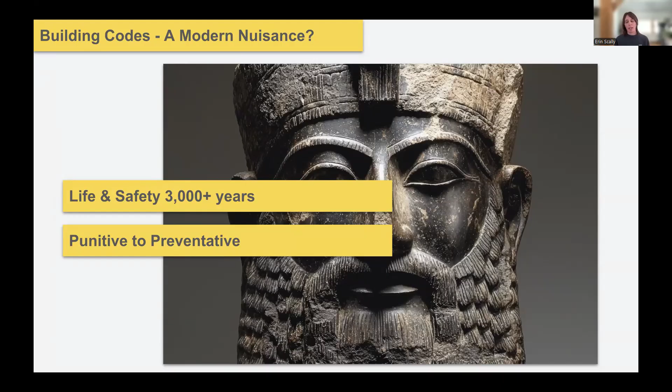But really, what we're going to get into today is energy codes. And we can see that energy codes are actually a more modern code development. Attention started being brought to energy as early as the 1950s in the States. People began to default on their federally backed mortgages because they could not pay both their energy bills and their mortgages. We would assume that 75 years later we don't have this problem, but we still do - people are still making that choice, to pay either their mortgage or their energy bills.

Nationally, attention was brought again to energy in the 1970s with the US oil embargo. The oil embargo sent gas prices skyrocketing and the cost of petroleum products through the roof. So there was a real need to start having a mindset where we conserve energy in our built environment. Around the 1990s, our model energy codes start to take shape, and in 1998 the International Energy Conservation Code started to take shape, and that's what we're here to talk about today.

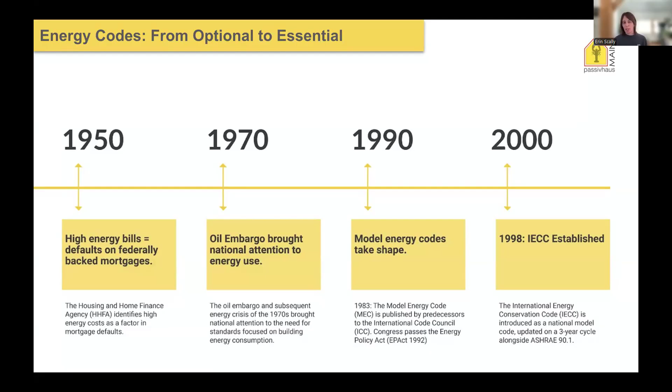So a very brief overview on what the IECC is. The IECC stands for International Energy Conservation Code. It's created and maintained by the International Code Council. The code book itself is built through a comprehensive stakeholder process, meaning anyone can submit proposals for a change. It's then reviewed by a technical committee and approved by a public safety official. New editions of the IECC are put out every 3 years.

So how does all this work in Maine? MUBEC, Maine Uniform Building and Energy Code, adopts the ICC base codes. That includes the International Energy Conservation Code, but also things like the International Residential Code and the International Mechanical Code. MUBEC then takes those base codes and makes Maine specific revisions.

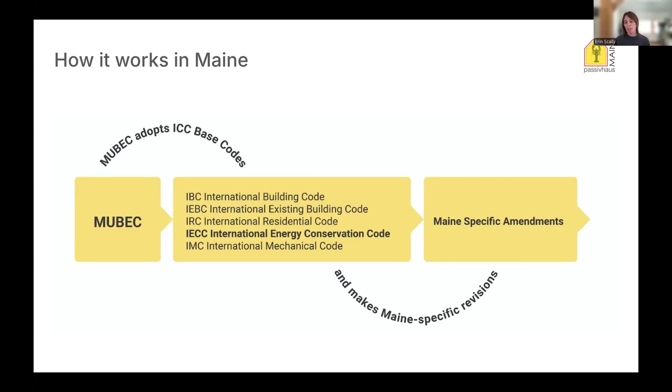MUBEC also adopts reference standards. Pertinent to commercial code is ASHRAE 90.1, the energy standard for buildings except low-rise residential, and ASHRAE 62.1, ventilation for acceptable indoor air quality. So it's the ICC base codes, plus the Maine state amendments, plus these reference standards, that equal the code stack that Maine builders can work from.

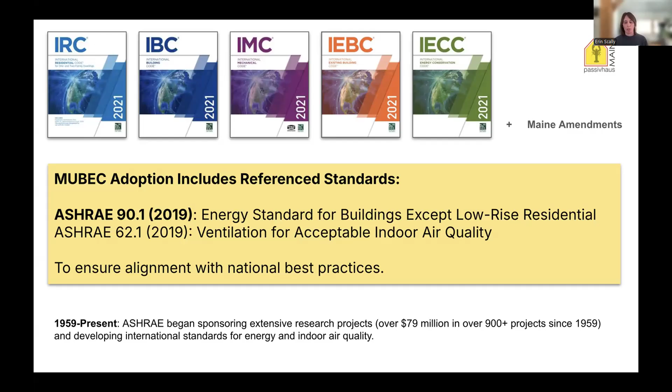It's really important to point out that MUBEC is law everywhere in Maine. All new buildings constructed in Maine must comply with the IECC and other base codes, plus amendments. The confusing point is that some towns with a population under 4,000 are not yet actively enforcing compliance, but that doesn't mean builders or designers in those municipalities don't have to build to code. They absolutely do. MUBEC is law all across the state. Everyone has to build to these base codes plus amendment standards.

So the question often arises, why do we build to code even when it's not enforced in a municipality? Again, MUBEC is still law, even if your town doesn't enforce it. You might have a CEO in your town, and if you're in a town under 4,000, they do not have to come and do inspections, but you still need to build or design to that standard. Ignoring MUBEC is a violation of the law, and non-compliance can cause problems down the road. Builders can be held liable for issues that arise.

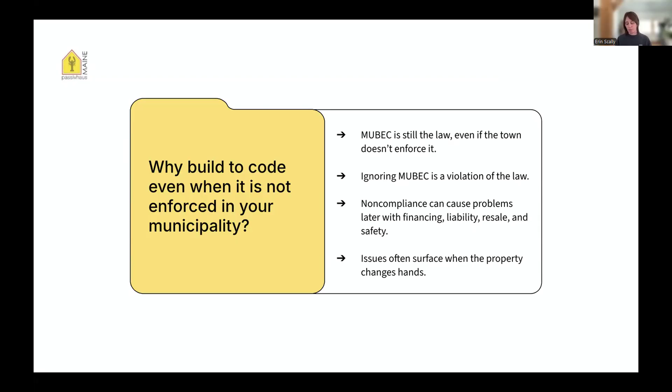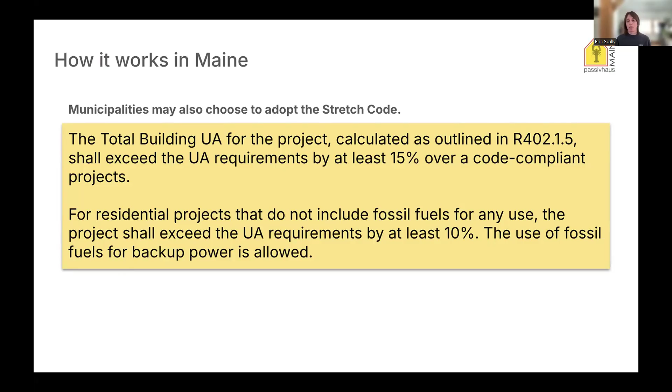One other point about MUBEC and its adoption process: they also have a stretch code, which means certain municipalities that opt to adopt it need to beat the base requirements by 15% over code compliance. Right now in Maine, there are only 3 municipalities using the stretch code: Portland, South Portland, and Freeport. So at this point, we know our base codes, and that we need to follow the base codes plus the Maine state amendments. You also need to be aware of stretch code depending on where you're building or designing, because you might also have to meet that requirement.

So where do we find these codes and information? The ICC base codes can be viewed on the ICC website for free. You can look at a PDF publication. The Maine specific amendments are currently housed on the Maine State Fire Marshal's website. It is moving to MOCA, Maine Office of Community Affairs, soon, but last I checked, MOCA still links through to the Maine State Fire Marshal's website.

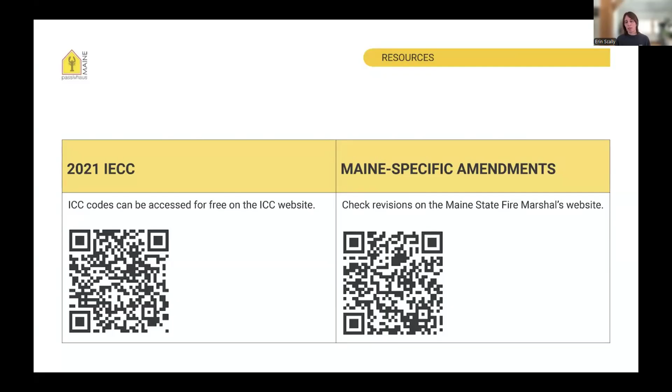Now getting into why we're here today: on April 7th of 2025, Maine switched from using the 2015 IECC to the 2021 IECC, which is a 10% increase in energy savings over those two code publications. For all the education and awareness needed when we change codes, we think, well, what is 10%? That doesn't seem like a lot. We have to zoom out to put this in context. That's a 40% increase in energy savings since 2006. So we're making big strides incrementally throughout each code update.

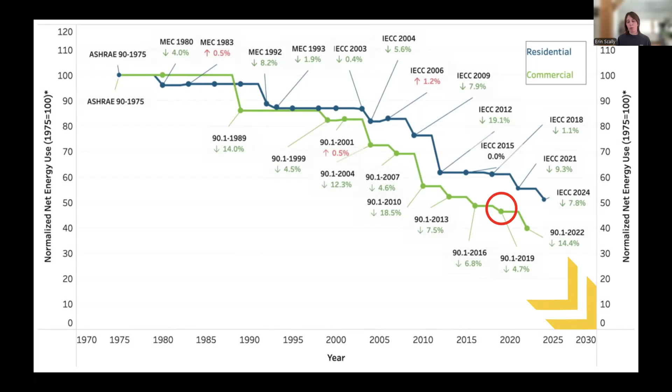We also know where codes are heading. This is a graph put out by the US Department of Energy. The red circle shows us where we are in 2021, pointing down to 2030 with the goal of net zero. This is why Passive House Maine, as a nonprofit, brings in people like Vamshi and Mike, who have been focused on energy modeling for the past 20 years and on high performance building, because we can see this is where codes are going. We're heading towards high performance and passive house levels.

So we know how to find our codes. We know which publications to look at. We know we have to understand the Maine state amendments. We also have to be aware of where we are living, whether codes are being enforced or not—we still have to build to the codes. And we also have to be aware of the stretch code.

Now we have to understand what is the commercial scope. What counts as a commercial building? By code standards, that's a non-residential building, more than 3 stories. On the left, you'll see a 3-story mixed-use building where the top 2 floors are designated residential, so you'd follow the residential provisions of the IECC, and since it's retail on the bottom, that would fall under commercial. But if you bumped that 3-story structure up to 4 stories, the entire structure would fall under commercial provisions of the IECC.

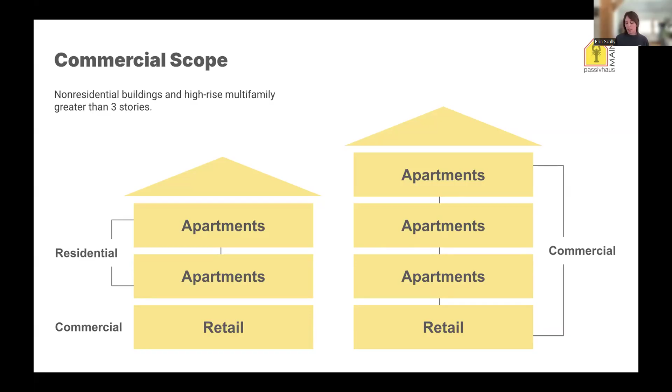So now we're going to jump into: we know what our codes are, where to find them, we have all that information. How do we show that we've met this energy code? That's called compliance. Compliance can be met in one of three ways, at the discretion of the building owner or designer. Within the 2021 IECC, you can choose the prescriptive compliance option, the total building performance option, or ASHRAE 90.1. ASHRAE 90.1, until this publication of the IECC, used to just be a state-adopted reference standard, but now it's actually listed in the IECC as a compliance pathway.

When we talk about how code changes between publications, we know that for 2021 IECC, the majority of the updates from the previous version, 2018, were increased R values or decreased U factors. Really, those increases or decreases were bringing the IECC into alignment with ASHRAE 90.1. ASHRAE uses a cost analysis to make sure that when they increase R value, the payback period for the occupant or building owner makes financial sense, that there's a return on investment on that increase of insulation.

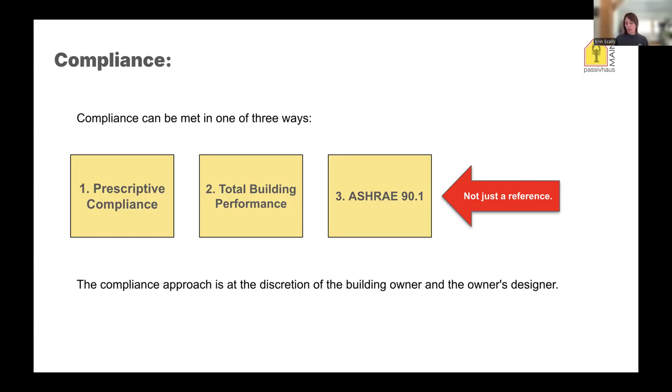I'm going to let Vamshi chime in here with additional energy efficient credits. Thanks, Erin. So one of the biggest changes in this particular IECC 2021 is the requirement to achieve additional energy efficiency credits. It's not just meeting the R values and efficiencies of mechanical systems or lighting power density, but you also have to get 10 additional points by choosing one of these things you see on the screen. These particular requirements push beyond what the prescriptive requirements are. You need to look at your occupancy group type. For example, a residential building has different weighting for points for different credits, and business type could get different weighting. So out of all these things, you need to achieve at least 10 energy efficiency points.

You have points for improving heating efficiency, cooling system efficiency, reducing lighting power density beyond what is prescribed, and additional controls for lighting. For residential projects, they have specifically called out three of them, shown on the second column at the top. One is recovering heat from condensers, or having solar water heaters instead of fossil fuel based water heaters for domestic hot water, using heat pumps, and so on, and also pushing air tightness further than what IECC prescribes. These are some important pieces to keep in mind when looking at the prescriptive approach for your project. Thanks, Vamshi.

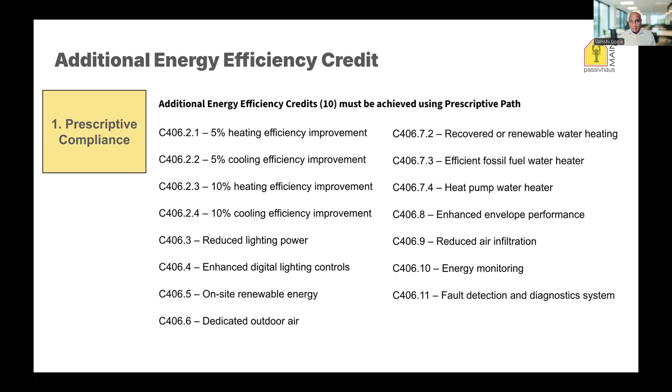The IECC, as noted, has three compliance pathway options, but the MUBEC has also adopted alternate pathways to show compliance that your building meets the energy standards, and that's the DOE Zero Energy Ready Home Certificate, or the Passive House certification, either by PHI or PHIUS—PHI being the Passive House Institute, or PHIUS being the U.S. version of PHI.

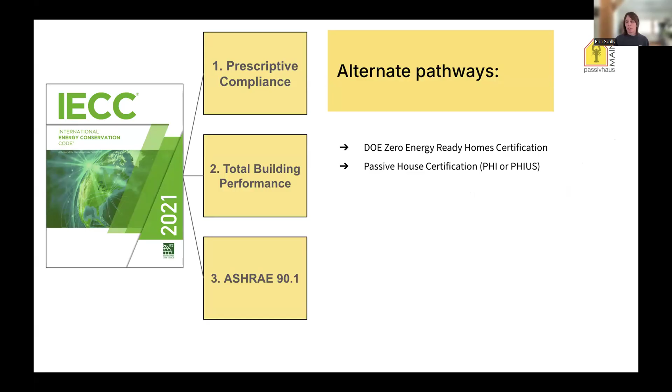Now we're going to get into the nuts and bolts of the compliance pathway options. We're going to chat first about prescriptive compliance. Prescriptive compliance in commercial can be met one of three ways: it can be met by following the R value table, it could be met by following the U, C, or F factor table, or it can be met by following the component performance alternative.

So in prescriptive compliance, you choose one of those pathways—say you choose R value and go by the R value table. You also have mandatory requirements regardless of which pathway you choose. So you have to meet the R value table, those three additional mandatory requirements, plus the energy efficiency package options, which are the credits Vamshi just outlined. You have to do all those things to show compliance the prescriptive way.

Prescriptive is the most rigid—you don't have trade-off or flexibility, particularly when following the R value or U factor table. You start to see some trade-off when you go with component performance, meaning the R value table lists every component of your building, from foundation to roof, with the required R value. Once you get into energy modeling, if you put in better windows and doors, you might be able to take reductions elsewhere. So energy modeling can be viewed as a cost savings, or at least a way of optimizing your insulation instead of just following the prescriptive checklist of R values and insulation values to meet.

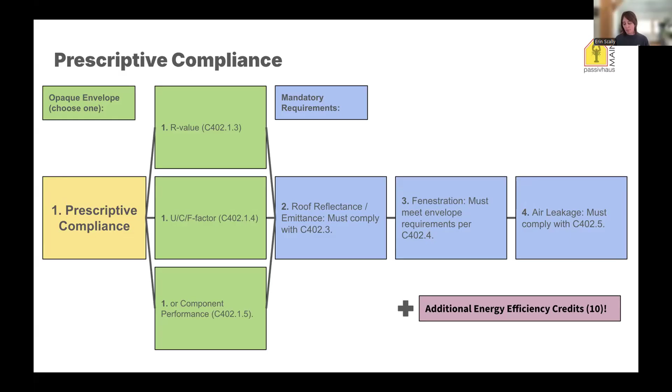I'm going to kick this one off to Vamshi, right? Or is it Mike? Yeah, I can take that.

As Erin showed earlier, there are three ways to meet the envelope performance requirements—R value, U factor, and this last one. With the other two options, you must meet those R values or U factors. With this one, it gives you a little bit of flexibility within the envelope components only—you cannot do a trade-off outside the envelope components. So if you're unable to hit certain R values for your wall systems, for whatever practical reasons you cannot insulate beyond the prescribed R values, you can compensate for that on the roof.

You could add an additional inch of insulation or 2 inches, whatever the case might be. So what it does is it takes the U factors of your walls, roofs, windows, slab on grade, and all your envelope components where your heat losses are through, and for each of those components you multiply the area of that surface.

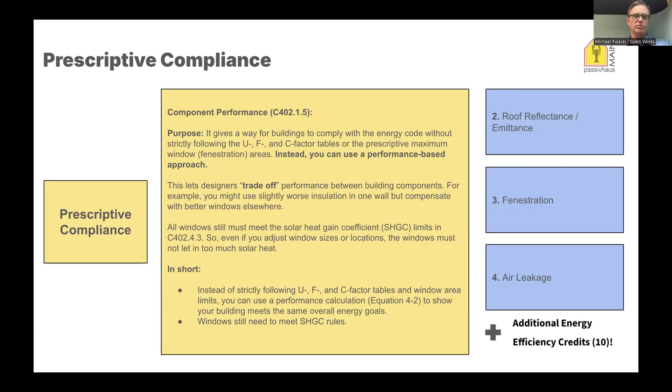I could just chime in on one other opportunity I see, which is to try to figure out how to cost optimize your envelope. This allows you, as Vamshi was saying, to put more insulation or better performance in certain components and less in others. So one opportunity is if you're using better performing windows, which is really important in our environment, you might be able to reduce the insulation on the wall systems or roof systems to accommodate that, and find the most efficient way to achieve your performance. It gives you that flexibility with a very simple tool, just doing a spreadsheet calculation of the U value of that product and the area in the code versus the U value and area of what you're proposing.

I'm also going to let Vamshi and Mike handle the next two compliance options. We have total building performance up next, and then after that, ASHRAE 90.1. Vamshi, do you want to take this one? Yeah, okay, so this is the other option that Erin showed earlier.

This is one option where you use an energy model to show that your proposed design is performing at or below the energy code. One of the advantages of this, as I mentioned earlier, is that with component performance for showing compliance with just the envelope piece, you are stuck with trade-offs within the envelope pieces, whereas in total building performance you can do trade-offs between different trades or disciplines. You may have really efficient lighting systems, really good lighting controls, and that could contribute to the overall performance of the building.

So what is really required in this approach or pathway is you create a baseline energy model which corresponds to your standard reference design case, your reference case, which is IECC 2021. So you're building your envelope systems as per the R values or U factors in IECC 2021, your lighting power density as per IECC 2021, your mechanical system efficiencies as per IECC 21, and so on and so forth. Then you create another model which aligns with your proposed design, and you build and develop that model, and the target is you need to be 20% less than your reference standard energy model.

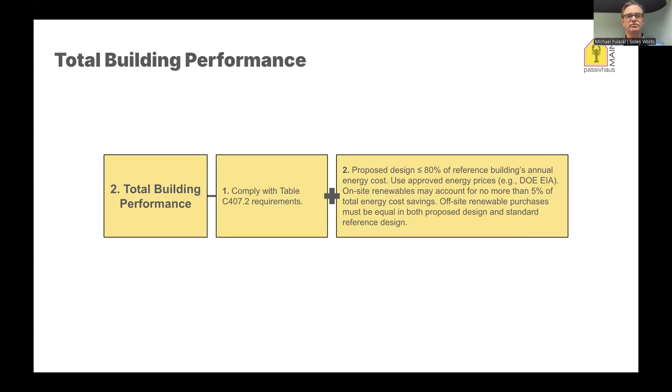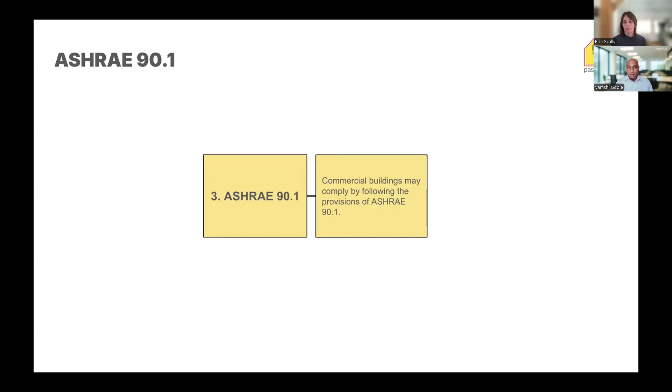ASHRAE 90.1 and IECC 2021 have been a little bit staggered historically, but now they're actually trying to align with each other, and there's always been cross-reference in IECC 2021 to ASHRAE 90.1 sections. So the other alternative method for showing compliance is ASHRAE 90.1 Appendix G or Section 11 for energy modeling, or you could also use prescriptive, which would be pretty similar to IECC 2021. The one important difference in ASHRAE 90.1 is they have clearly described the modeling methodology, so it's very well detailed out. There are two different approaches even for energy modeling, Section 11 energy cost budget, and the performance based pathway, which is Appendix G.

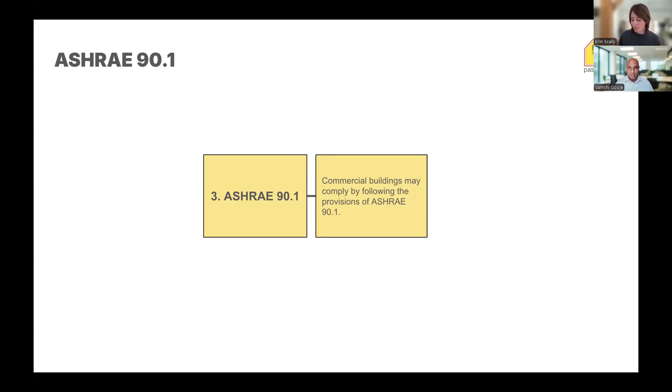You do need to know a few key details: what is your energy code, where are you building, project details, building type and size. You need to know your area takeoffs for your envelope—roof, walls, floors, foundations—and what the R values or insulation values are. You need to know your lighting information, mechanical system details, and your service water heating information. But when you have all that in hand, you can sit down and use ComCheck.

Once you have all the information put in, it will show you very clearly if you met the energy conservation code. It really takes out the guesswork of whether you've complied with the code or not, less referencing the code book itself or reference standards. New in the last few months is that ComCheck and ResCheck both account for state-specific amendments. So if you plug in your state and your zip code, it will automatically load in the state-specific amendments, so when you see if you comply, you know you're not only complying with the base codes, but also with the state amendments.

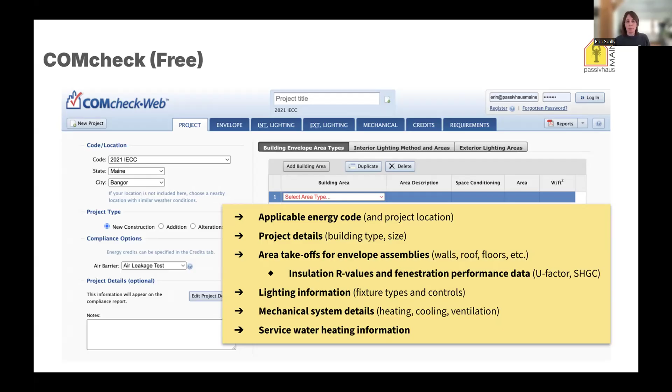Existing building scope. We always have questions about: I'm not building a new commercial building, I'm not building a new residential house, but I'm working on an existing structure. What does that mean for me as far as meeting the IECC? It really depends on the scope of work.

Additions: the new addition must comply fully with the 2021 IECC. But largely, with any scope of work, the parts that are untouched or unchanged in the building do not need to be brought up to meet compliance of the 2021 IECC.

If we're doing something like changing an unconditioned space to conditioned space, typically that whole entire space needs to meet the new energy standards. Mike or Vamshi, do you have any other additions for existing building scope? No? All set?

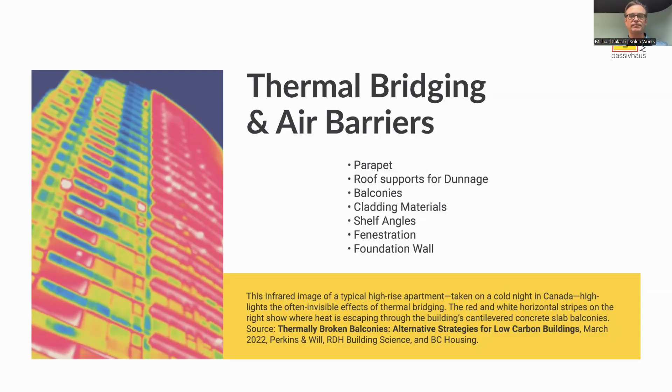That's a lot. So that's how much you're wasting the money by investing in an envelope if you're not addressing this one. And most of these areas that we're going to run through are transition details. It's not necessarily just one

And the issue with having parapet is if you have short parapet, you can still manage to get a pretty decent detail. But as your parapet height increases, you have potential for some of the warm and humid air from the inside escaping into that area and potentially causing some condensation issues. So it's best to avoid it.

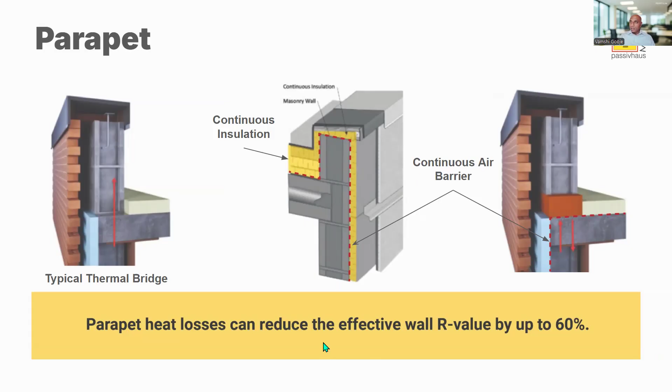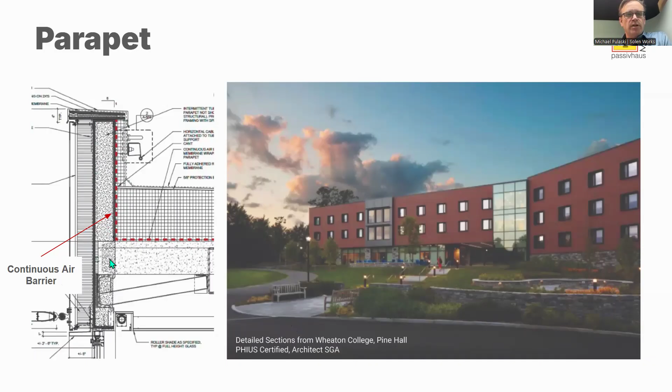Even though it's relatively small, it's enough to cap off the top. And then you can see the air barrier there is in red as it goes all the way around the entire, up the entire parapet wall and then come back and around on the outside.

And the next detail is, there are two types of thermal bridges that I should have actually started with. One is the linear thermal bridge, which means it's very continuous - it goes across the entire axis of a particular surface. And the other one is the point thermal bridges. So point thermal bridges, you can think about all fasteners used to secure the sheathing to the structure, right? So you don't have continuous thermal bridges there, but only point thermal bridges.

So one of those point thermal bridges is the roof screens or dunnage that you have on the roof. And similarly, they have potential for 15 to 20% reduction in R value when we run heat loss, heat transfer analysis. It depends on how many point thermal bridges you have, but that's a rough average of how much heat you can lose through these details.

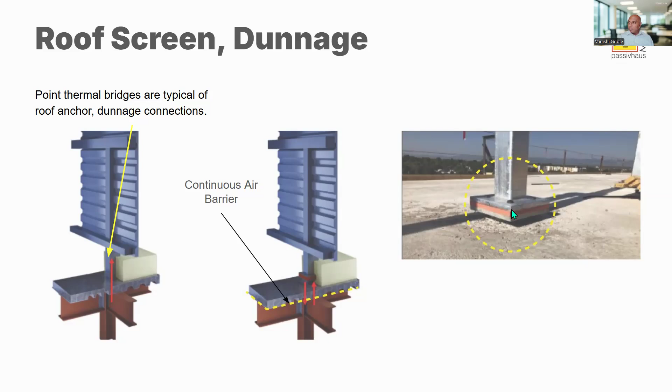And here's a similar detail. And this is the detail from the Wheaton College project. And this you have structural steel tubing coming up out of the deck, and you can see the Fabreeka pad there called out. It just creates a separation between the warm concrete block and the steel plate.

And one of the primary reasons that we're showing you these thermal details is that this can be an issue from condensation. So if you have this cold steel plate coming in and connecting with warm air on the warm slab, water can condense on there, create condensation, and have problems, and that can occur in any of these situations. So having these thermal break pads and our other thermal break details is critical to eliminating that risk for condensation.

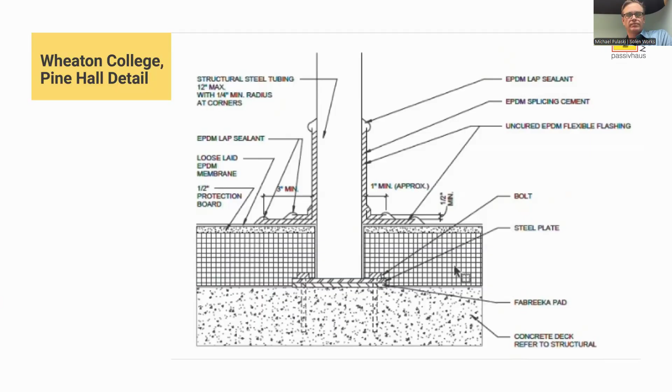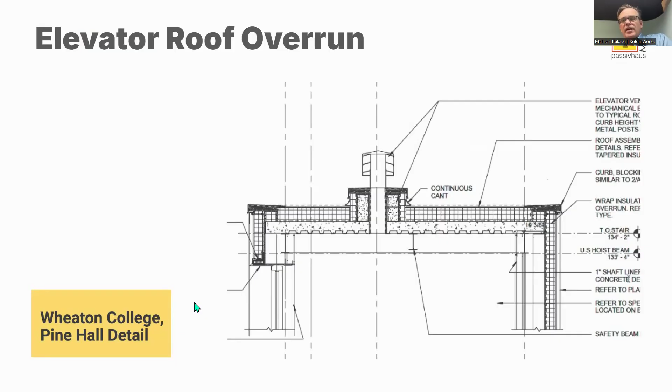Similar detail for elevator overrun here. This is a detail that exists on every commercial project, and you just have to make sure you're detailing it and paying attention to the air barrier on it. There's less on the thermal bridging here, but more the fact that you have to follow the dash line around the outside of the wall system that comes up over the top of the roof, and then comes all the way into terminating at the curb there.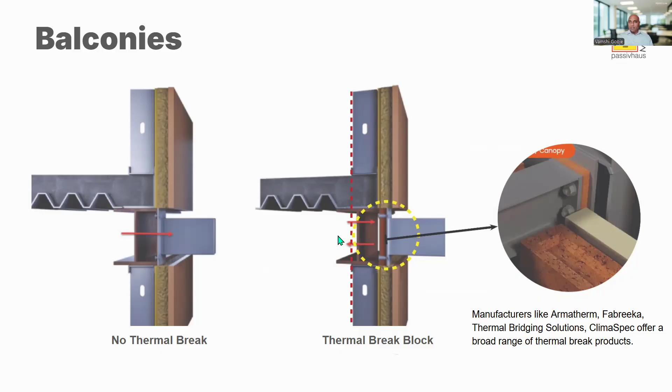The other continuous, linear, or point bridges that could happen quite often is when you're attaching your rain screen to your system. You either have Z channels, Z girts, or hat channels, or whatnot, the way you design it. If these are not decoupled from the structure, they can also lose up to 65% of heat, or loss of R value in the envelope.

Just to highlight how critical this is when you're using a prescriptive approach for compliance, if you don't address these small details, you may have to end up insulating significantly, which makes it almost impractical to meet your energy code. So these are very important, especially in the latest code. It used to be there was no verification, and now they want to make sure your thermal bridges are accounted for when you document your U factors in your drawings and specifications.

So there are Z-girts, there are some fiberglass-based spacers, and so on and so forth to eliminate thermal bridges.

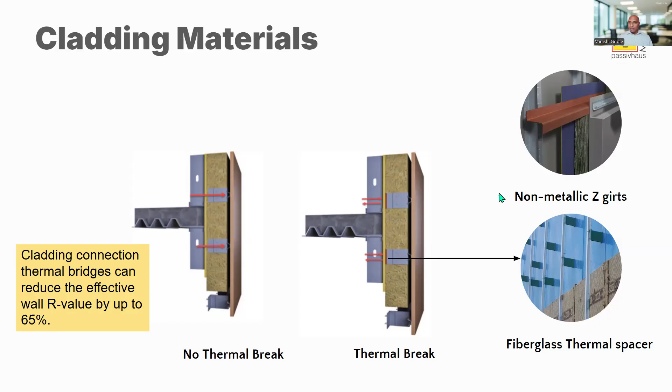Shelf angles, again, continuous when you have masonry, which you'll see in a lot of buildings in Maine as well, especially in K through 12. They have some face brick facades, and you have similar heat loss potential through the envelope. So it's good to look at thermal break pads where your shelf angles are connected to your structure. You also have fiberglass reinforced shelf angles, which have slightly better R value.

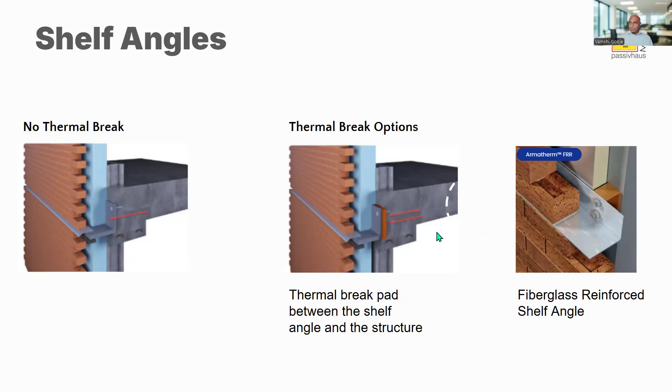This is an example, a quick detail from Wheaton, and you can see that outside of the wall system there's actually about 5 inches of mineral wool there, and there were some Z-girts in between that then connect to the angle that holds up the brick. So that's the detail we ended up working out through Wheaton, but the key piece here is this 5 inches of mineral wool.

On this project, as kind of a belts and suspenders approach, they ended up putting in closed cell foam on the inside in the stud cavity to help seal up any potential penetrations that come through that exterior wall.

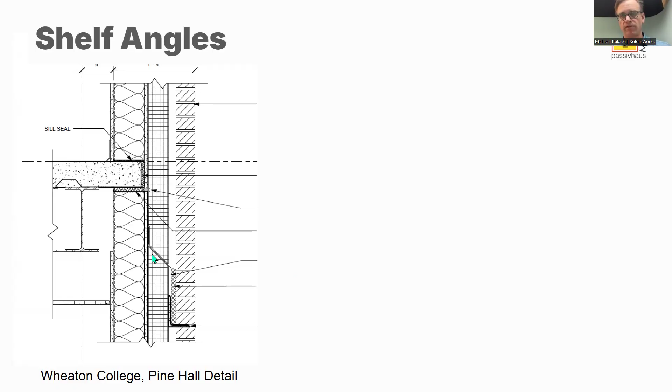And this is another critical area to look at for thermal bridging: the fenestration, your glazing system, and how it's connected to the wall, especially at the thermal window buck. That is the area where you usually can't get continuous insulation on the outside, as shown on the left side of the slide deck here.

But there are options where you can potentially use a thermal buck, which is actually an insulated material, so you don't lose as much heat through it. Or there are alternative ways to detail it so that the window glazing aligns with the exterior insulation, so you're not going inside, in which case you'll have heat loss through the frame and everything. And the frame is the weakest point in the whole window assembly too.

And it could also potentially cause condensation when you don't take into account these heat losses.

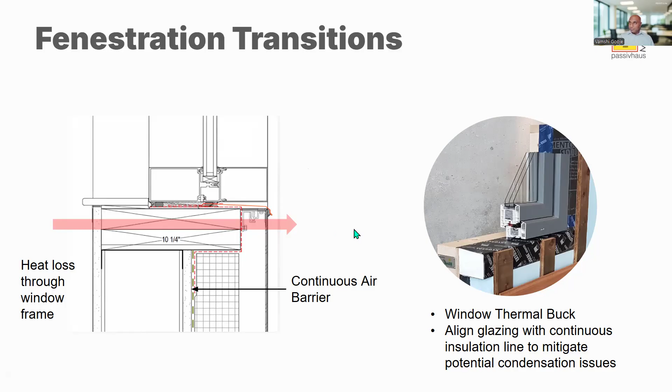And this is just the detail for the Wheaton College. In this case, what we decided to do was bring the insulation up to the sill and try to create a small thermal break there between the sill and the window assembly, both on the top and the bottom.

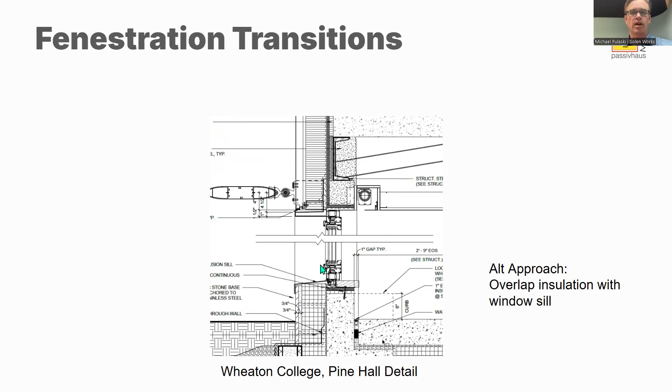And the last detail to pay attention to is the foundation. Typically, we'd like to see the insulation going all the way from the wall, the continuous insulation, to the top of the footing. If you have below-grade conditioned spaces, it becomes obviously even more critical to continue that insulation to the top of the footing.

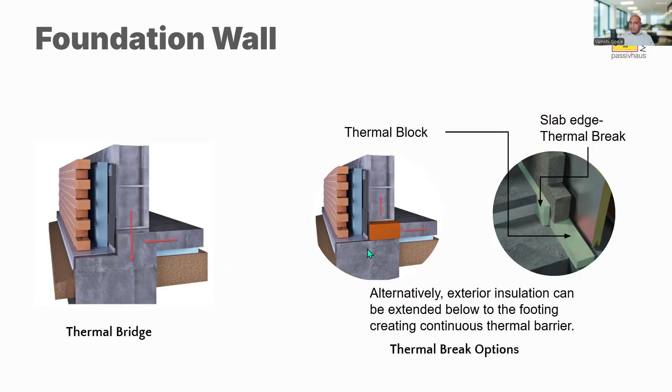And otherwise, you also lose a lot of heat through the slab edge. Again, there's an easier way to do this, which is using the proper detail to continue the insulation down the grade, or you could also use the thermal blocks from the manufacturers we mentioned earlier.

And this is again the detail from Wheaton College. We're down at the footing, and you can see, as Vamshi noted, the insulation goes continuous all the way down to the bottom of the footing.

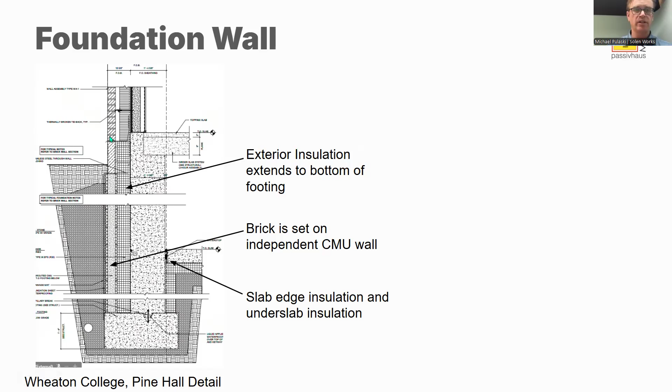And then just to the left of the insulation is actually a CMU wall that then comes up to a piece of granite that then supports the brick. So that's how the brick ends up being supported from the ground, all the way down to the footing. And that way you can have this continuous insulation that comes all the way down.

The other piece to note here is at the slab edge. So a typical slab edge detail, to the bottom right there Vamshi, has a piece of insulation, usually about an inch or so, that separates the slab edge from the stem wall, and then you can see the insulation underneath it as well, underneath the slab.

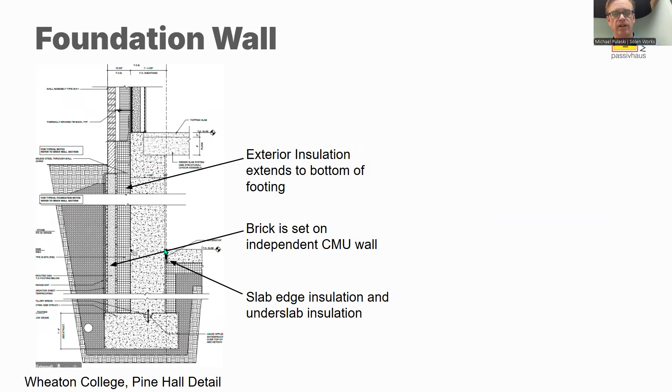Okay, so moving on to air tightness. One of the biggest challenges you'll come across in the commercial sector is the scale of the project, right? The blower door test has historically been used for single family homes, smaller scale projects. But how do you test infiltration in large scale commercial buildings?

As we mentioned, it moved from intent to verification. So you need to submit blower door test results for your projects to the code officials to ensure that you have met the 0.4 CFM per square foot at 75 pascals.

Here's one example of how we evaluated different options for large scale buildings. This is coming out of a 250,000 square foot commercial building. We looked at potentially doing an in situ mock-up so that it doesn't impact the schedule, because that's going to be one of the biggest challenges: getting the air infiltration testing integrated into the construction schedule.

If that is not possible, then the other option is to do an on-site mock-up, like an 8 to 12 foot mock-up section, so that different trades can coordinate who comes first and who comes right after. And it's very important to have one primary air barrier lead, so they can translate the coordination pieces and how different trades are going to work in tandem.

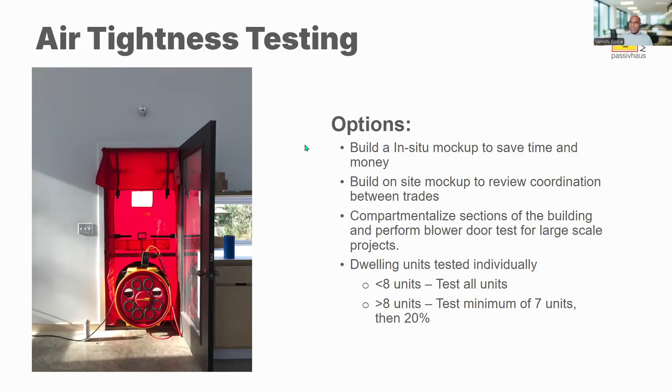There are a lot of things to cover here. It's a topic in itself, but we're going to give you an overview of what to pay attention to.

Mike earlier mentioned the standard is 0.4 CFM per square foot, a pretty airtight building for commercial projects. For residential projects, slightly below that. There's a primary air barrier that has to be redlined in the drawings and submitted for code officials to review, to make sure it's continuous with no gaps or breaks in the air barrier.

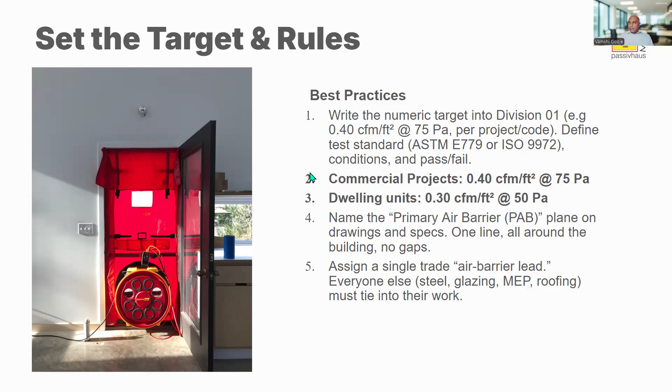Some of the design phase and construction best practices we'll walk through quickly here. Mike, you want to jump on this one?

Just to highlight a couple you see on the screen here: pick a particular air barrier type and stay consistent throughout. Don't change types throughout, because you can have products that may not work well together, and over time they may separate.

The transitions, we hit up all those detailed transitions. That's why we went through each of those parapet details down to the foundation detail. That's where your leakages are likely to occur, as well as around the windows, so that's where you want to pay most particular attention.

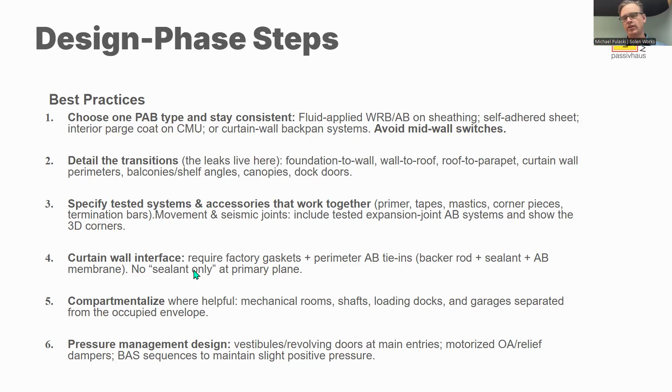There are also issues to pay attention to around the curtain wall interface. Using compartmentalization is helpful as well. And then look at managing your pressure during design, pressurizing vestibules and certain spaces within the building.

From a design standpoint, the spec language, you want to have your submittals. You're going to have submittals to review, to look at this to make sure it's acceptable with your design.

Mock-ups are also very important and highly recommended. We can do in situ, in-progress mock-ups as well as standalone mock-ups, but figuring out a game plan ahead of time is really critical, and having the trades come around and look at those mock-ups and work through the installation is really important.

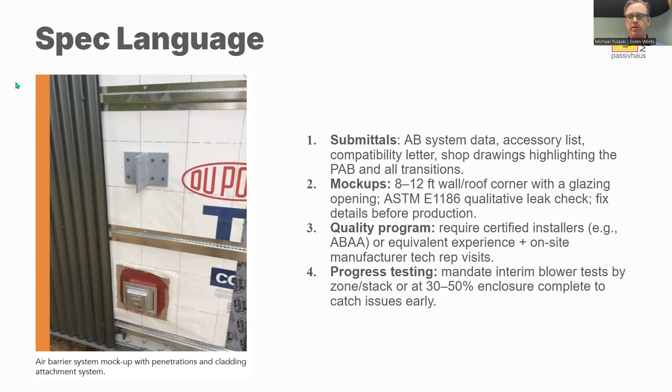On the contractor side, you need an enhanced quality control program. Once you do this once, we see from contractors that it becomes part of your standard process, just one more thing to pay attention to. Somebody on site has to be dedicated to managing the air barrier and making sure there aren't additional penetrations being made, or if there are, that those are sealed up.

The last thing is interim testing in the construction phase. We really recommend about halfway through construction, before drywall gets put on, that you come in and do a blower door test, test the building, do smoke testing, see where the leakages are. There always are some, and it's much easier to fill those leaks before you have drywall on and before you start putting finishes on. So that's critical.

Also during construction, a couple of best practices we've seen: getting your subs together ahead of time and having a pre-install meeting to walk through these requirements, because they are new on a lot of projects. So make sure, one, that they know about them, and two, you talk through sequencing or where the trades overlap in producing those air barriers.

Again, managing the edge and the shafts and the stairs and the MEP disciplines where your penetrations are. This is something MEP contractors aren't typically used to sealing up their punctures very well, so this needs to be elevated. Overhead doors, if you have them within your system, are often also leaky, so make sure you've got high performance gaskets specified on those.

As you're going through, make sure you document any fixes that occur, and take a lot of photos, because once you cover up the walls, you don't know what's behind them, and that'll save time later on if you need to fix something.